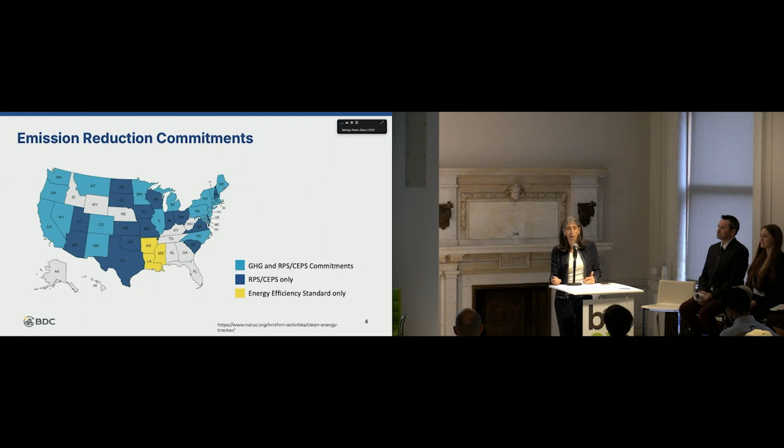So let's start with the big picture. Our country is trying to decarbonize. The states in light blue have climate commitment reductions of 75% or more by 2050 and greening the grid. And to give you a context, in order to do this, you have to take on buildings because they're about 1/3 of our emissions. So the primary strategy for decarbonizing buildings right now nationally is having buildings that heat with gas and with oil transition to electricity with air source heat pumps. And you can see here, last year at Climate Week, 25 governors, part of the US Climate Alliance, pledged to quadruple the number of heat pumps to 20 million by 2030.

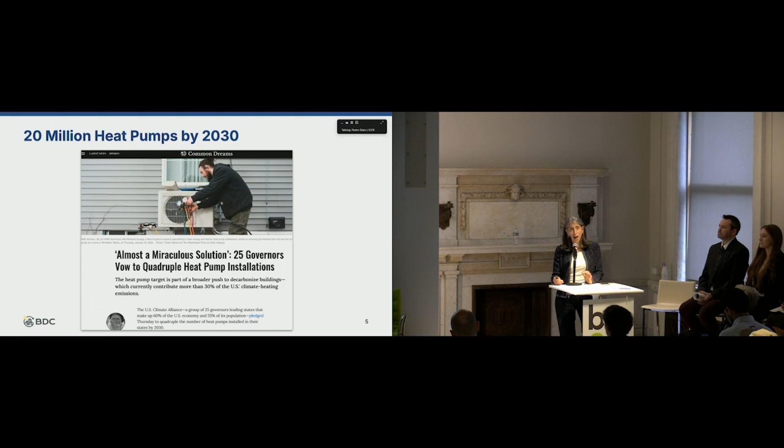And air source heat pumps are fantastic. They provide both heating and cooling, and they're 3 times more efficient than gas. And so for an individual household, they're great. But for a system, it has major implications. So just to give you a sense, here's a neighborhood. Imagine this neighborhood is all on gas. There's tons of incentives for you to transition to heat pumps, so people start doing that.

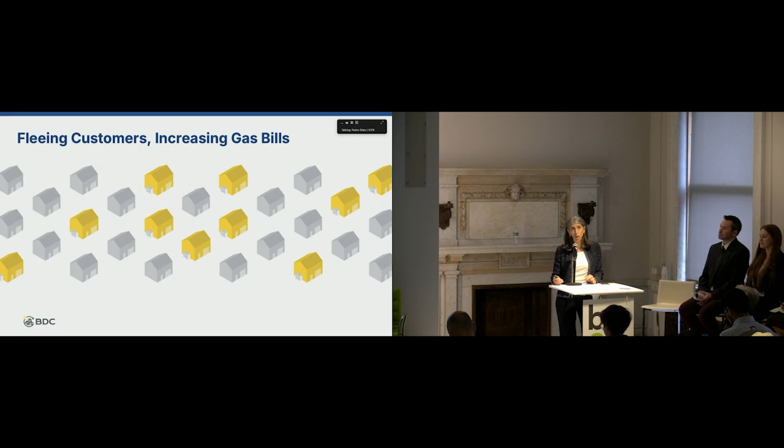And what happens is that the more and more homes get off the gas system and electrify, there are fewer and fewer customers to pay for the whole fixed cost of the gas system. So that has a huge cost implication. The price of gas for customers will go up and up. And that's a negative feedback loop that causes more people to leave the system. In the end, the only people left on the system are the ones who can't afford to transition, and the people who, for example, rent, so they don't have the power to transition to electric. So this is an enormous equity issue, and also a big concern for gas utilities.

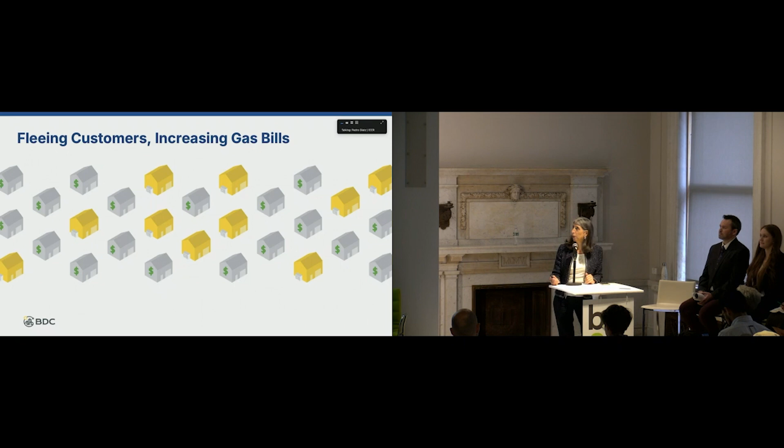So we at the Building Decarbonization Coalition advocate, instead of this one house at a time, how about we do whole neighborhoods at a time? And that way we can have a phased, managed transition instead of this one house at a time approach. And one of the ways to do whole neighborhoods at a time is with thermal energy networks. That is an umbrella term for connecting buildings to share heating and cooling with a pipe filled with a non-combusting fluid such as water.

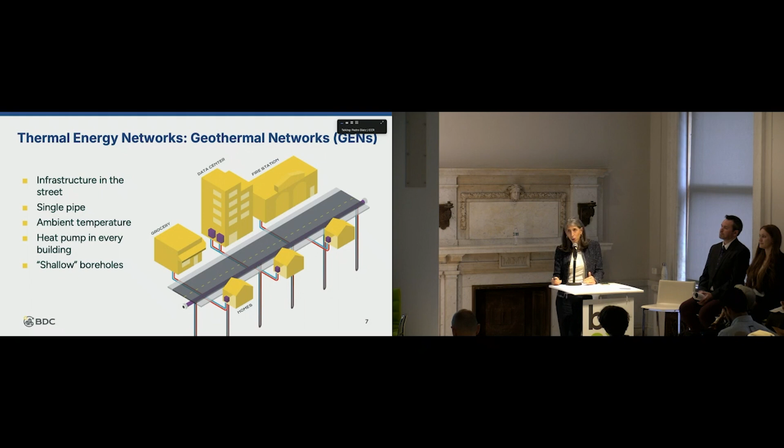Instead of a furnace in your building, you would have a ground source heat pump, and you would have shallow boreholes, or you could have a river or the ocean, but basically some place to store the energy, probably 200 to 1,000 feet, so that's shallow. Many of you think of geothermal, and you think of Iceland. That's geothermal power, and that is about 8,000 feet, so really these are very shallow.

So this is how it works. You can imagine that water pipe down the middle of the street. That tall building there could be a data center, and data centers always want cooling. And so what they do for cooling is that they're rejecting heat. That rejected heat can then travel down the street and heat all the buildings down the street.

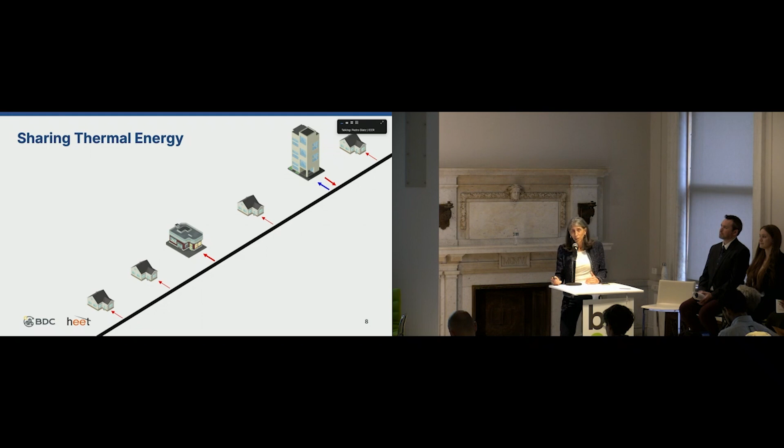In the summer, nobody wants heat, so all of the homes with their heat pumps can reject their heat into the boreholes, into the ground, and then when it's cold again, that heat can be used to heat the buildings. So in this case, you're not creating any energy, you're just transferring it from buildings to each other and from the ground to the buildings, and you're using the earth as a battery.

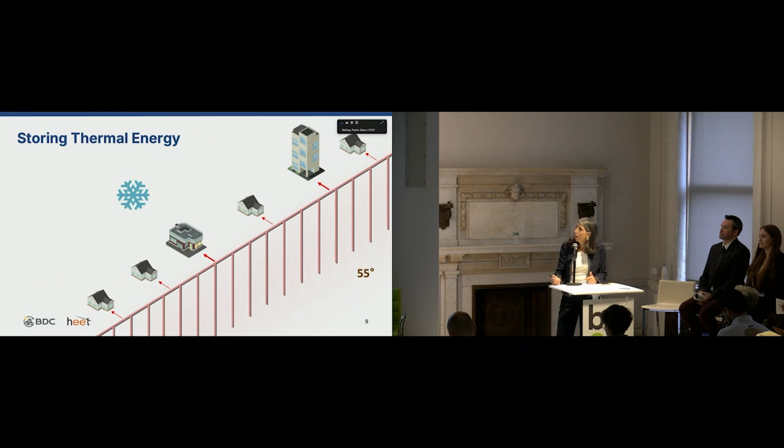The 55 degrees there is because the subsurface of the earth is a constant temperature. Here in New York and Massachusetts, it's around 55 degrees, and this allows the system to be really efficient. So that's big picture how it works.

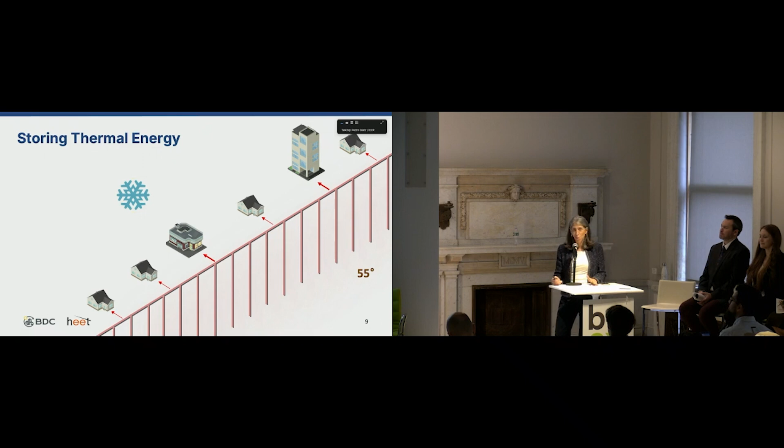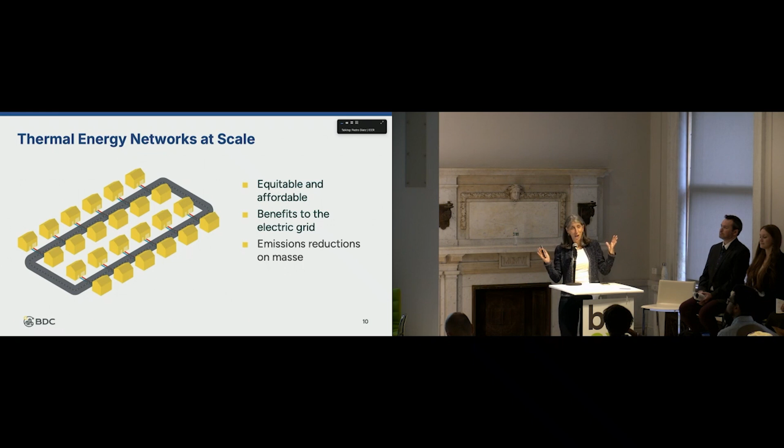Now I'm going to transition into scale and why scale really matters versus the one house approach. So when you transition a whole neighborhood at the same time, you get some incredible system benefits that we have to consider in this transition. And so here's the three I'm going to get into, and I'll start with equitable and affordable. We just talked about equitable. When you do this at scale, you can take a whole neighborhood, whether people rent or not, or whether they're high income or low income.

In addition, in terms of affordability, there's not a lot of data because we only have one system that's gone live, but there's some studies that have looked at this, and they're estimating that our bills are going to be going down. This study was done by E3 for Massachusetts Future of Gas Proceeding, hired by gas utilities, and it found that the building-by-building approach has the worst energy burden, and the gas to geothermal systems has the best, the lowest energy burden.

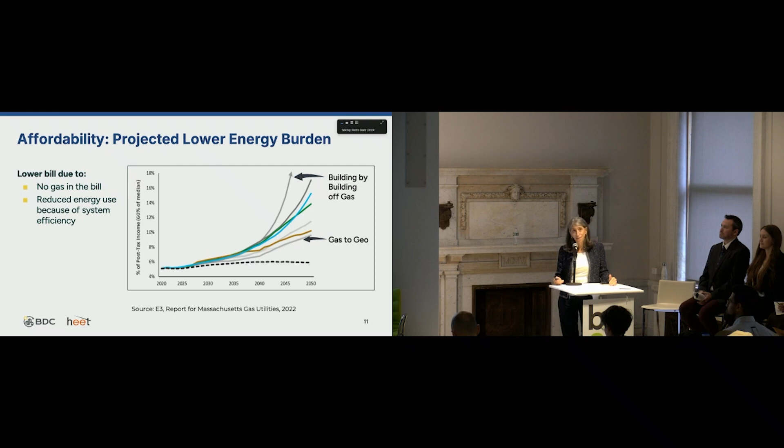And it kind of makes sense, because when you use these systems, you get rid of gas. And so remember, half of your bill is usually gas and half infrastructure. The gas part is gone. And then these systems are incredibly efficient, so you're using very little electricity. These are about 600% more efficient than gas systems. And so that efficiency also has electric implications.

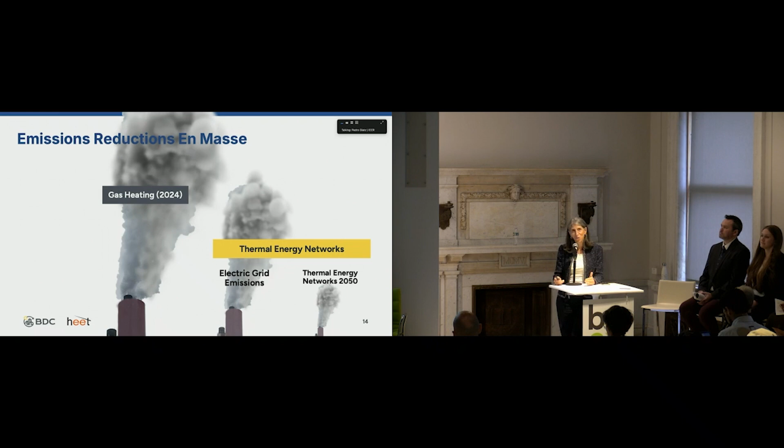And then, we are getting into this because of emissions. So when you transition, there's no on-site combustion with these units. The only emissions are associated with the electricity, the tiny bit of electricity to operate the heat pump. And as the electricity greens, you're greening everyone who's on these systems, so that by 2050, however much emissions are associated with your electricity is what these systems would have.

Okay, gas, why gas utilities? This is a question I get often. The answer is a lot of others are doing it. There are over 50 college campuses that have done this transition. There are private developers, there are communities.

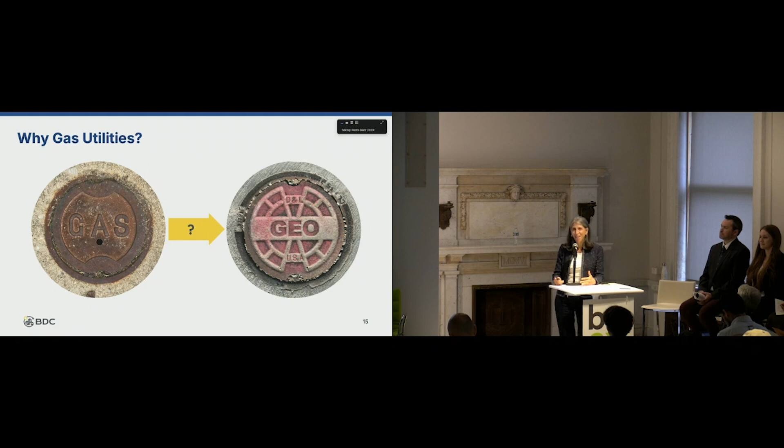But gas utilities are really important because if we electrified every building and did nothing with the gas system, we would still have millions of miles of gas pipe under our streets with a very powerful greenhouse gas with a future shrinking customer base. So a major problem. We have to take this on. Here is the reason for why we need this safe and managed transition.

So the question is, wouldn't it be so much better to replace our gas pipe with water pipe? And this is also from a safety perspective, just think of that, which is this is carrying an explosive gas. And so we actually can't just think about the electric side. We have to think about how are we going to transition and decommission these pipes.

And the gas utilities are the ones that have the expertise to do this, which brings me to the labor force. This is a really important path for existing utility workers into the green economy. The gas pipes and the water pipes for thermal networks are practically identical. And the utility workers have all of the skills they need to do this. They require minimal training, and we could do this at scale pretty quickly. Same with HVAC technicians, who could install ground source heat pumps.

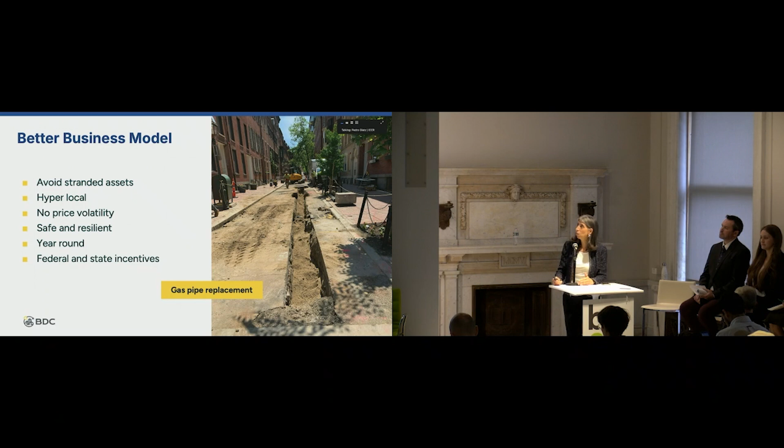So anyone in the country can do this except for gas utilities because they are only legally allowed to sell gas. They are regulated entities, and so we have to pass legislation. So far, 7 states have passed. I've included California, but the governor has not signed. And Minnesota and Massachusetts passed just a little law that allowed piloting.

New York had an amazing coalition that came together to not only mandate that the largest gas utilities had to file 1 to 5 pilots, but they also put in some really good labor provisions and equity provisions. And then the rest of the states learned a lot from New York and tried to incorporate all those provisions and then tailor them to their state.

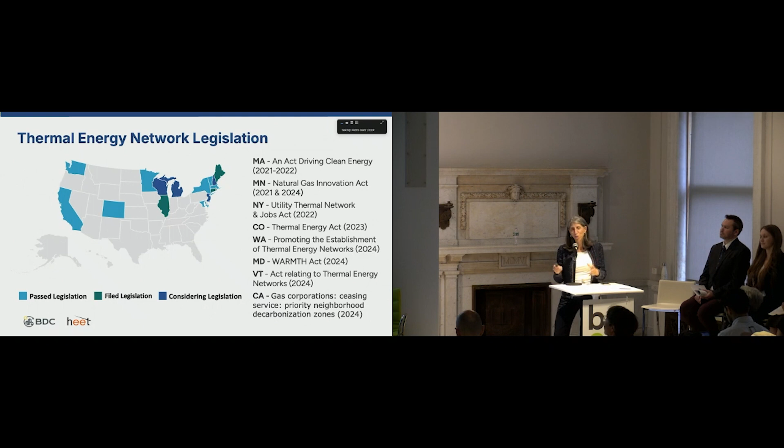And then, of course, the costs to the customers are very low because we're doing this at a utility scale, the cost can be spread across all customers and across time. And so far, it's been a huge success, and the customers are really happy.

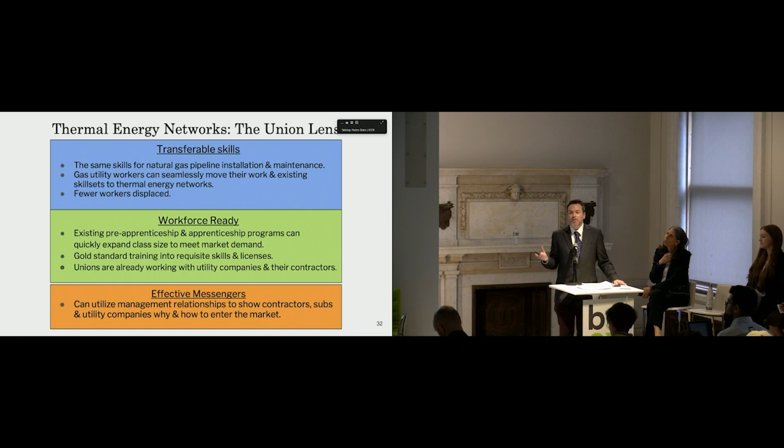The unions in the trades have a very important role in expressing that message and explaining to their employers exactly how to do it and get into the market and get ready for it. And then the other piece is just transition, justice, equity in our communities. And thermal energy networks provide the scale, as Ania was talking about, that we need, not only for consumers, but also for workers. And it's an important thing to think about when we're thinking about large-scale projects, opening up doors for new people into these careers that don't have that door open available right now.

When you see the apprenticeship classes grow, you'll see more people, especially people who come right from the front lines, people who are experiencing poverty, people of color, who really need that kind of leg up. They'll be able to get into those programs, and it's really those market signals and the policy signals that these apprenticeship programs need to see in order to be able to expand that opportunity.

Just one quick hit before I wrap up: in Rhode Island, a consulting firm did an analysis of the apprenticeship programs in our region, and they found that the union apprenticeship programs are actually more diverse than the non-union apprenticeship programs, and that was an important takeaway for that consultant.

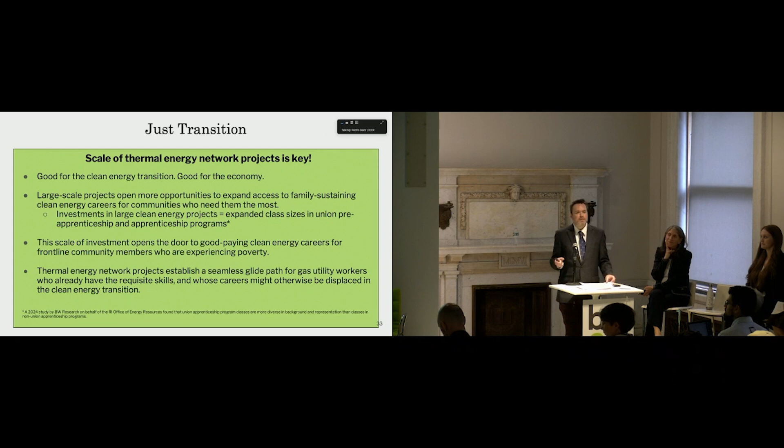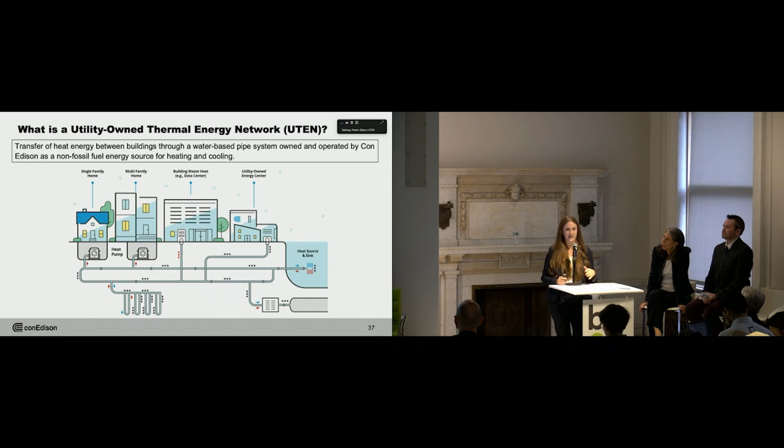Some common heat sinks are large open bodies of water like rivers, but more commonly, we're concerned with mechanical cooling equipment like cooling towers in order to cool down the fluid. A customer would connect to the network by a heat pump, and the heat pump would extract heat from the UTEN to provide space heating and/or domestic hot water to the building. And to provide cooling, if it's at an ambient temperature, like 60 to 80 degrees Fahrenheit, or even a little lower, you can extract heat from a building, put it into the UTEN, and it will provide space cooling for a building.

So the reason why I'm here today is because of the Utility Thermal Energy Network and Jobs Act that New York State passed into law in 2022. So the main outcome from that is that it required the 7 biggest utilities of New York State to propose at least one pilot project to our regulators, the Public Service Commission of New York.

So some drivers behind this law that was passed is to give the state another tool in order to help achieve its aggressive decarbonization goals by 2050. Building emissions is one of the state's largest greenhouse gas emissions contributors, so UTENJA is meant to help buildings electrify to decrease those greenhouse gas emissions. And then another point that was made earlier is the importance on the workforce creation and workforce training for the upcoming natural gas transition.

Another thing that will be tested out by these thermal energy network pilot projects is to test out if we can really help customers electrify in a cost-effective fashion, especially in disadvantaged communities. Disadvantaged communities are meant to be in at least one of the pilot projects that a utility proposes to the Public Service Commission.

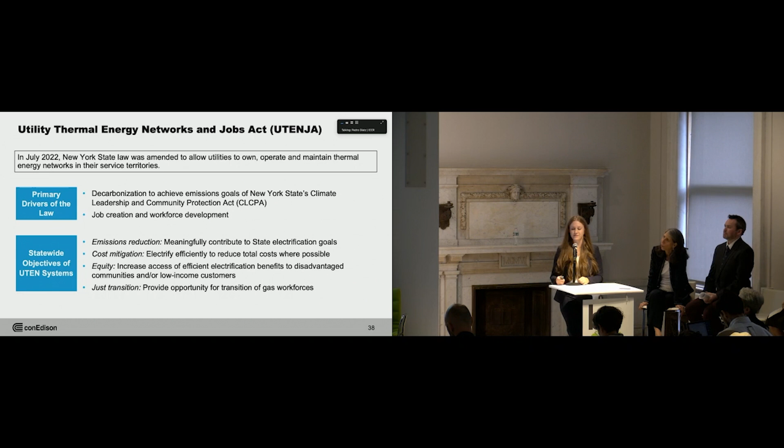So Con Edison received its approval letters for all three of its pilot projects in April of this year, and we were authorized to spend up to 10% of our projected project costs for our three pilot projects, which is around $17 million. So we have 9 months in order to come up with construction-ready drawings and to come up with a customer protection plan for the customers of all of our pilot projects. So after that 9 months, we'll make a filing of all of the required information, and we think that we'll do that in the middle of next year.

And then we'll have to wait for a public comment period and for UTENs to be added to a monthly Public Service Commission meeting. So then after that meeting, we'll learn which of our pilot projects are approved for construction. And we think we'll know that toward the later part of next year. So once we learn which pilot projects are approved, we'll have to enroll customers, and then we'll start construction. And construction is estimated to take about a year and a half, and then it will start no later than 2026. So once it's constructed, all the pilot projects have to be in operation for 5 years.

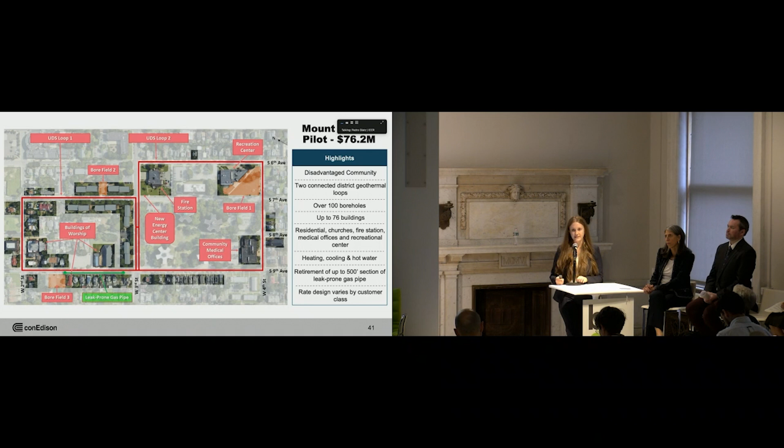So next up is our first pilot project that we proposed in Manhattan. It's in Chelsea, which is another disadvantaged community. We hired Ecosystem and their partner AKF to design this project for us, and the total project cost is estimated to be around $92 million. That's for everything, for the whole project lifecycle: design, construction, operation, maintenance, contingency, labor, et cetera.

So the thermal energy resource for this project will be a data center and the rest of the commercial office building located at 85 10th Avenue. So we will extract heat from that large building's chilled water plant in the basement from the condenser water, and we're going to put it into our UTEN. Our UTEN will run underground along West 16th Street, and it will be delivered to heat pumps in a new energy center building that we are going to build. And it will provide domestic hot water to 4 New York City Housing Authority, or NYCHA, buildings on the Fulton Houses campus. And we are also going to provide heating and cooling to one of those buildings.

One of the reasons why we're excited about this project is that it's in a pretty great area for alternative thermal energy sources other than geothermal. So there's a whole bunch of other data centers in this area that we could expand to in Stage 2 operation for this pilot project. And it's also close by to the Hudson River that we could potentially explore in the future as well. Like Mount Vernon, bill caps will be in place for this pilot project in order to prevent NYCHA from paying more than what it currently does for its HVAC needs and domestic hot water needs for these 4 buildings.

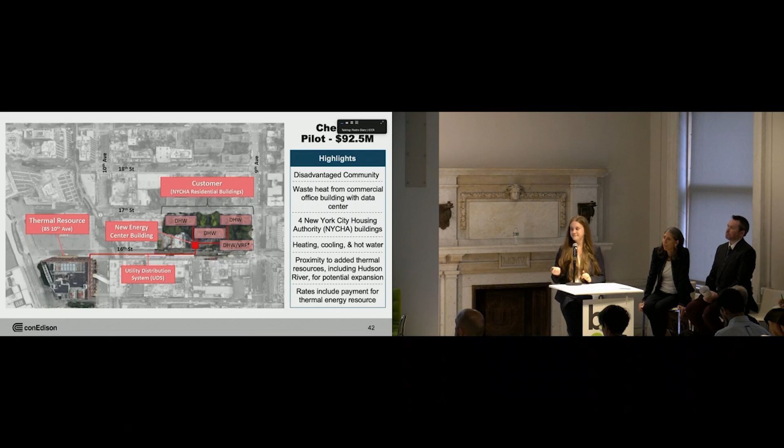That's my standard joke whenever I give these presentations.